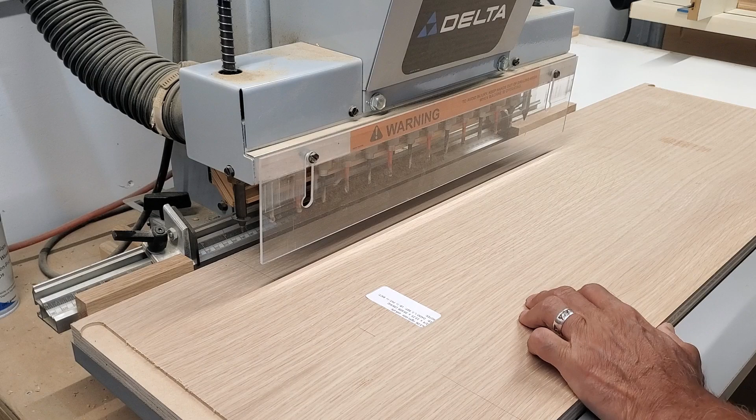So, for reasons I'll get into a little later, I no longer have this Delta line boring machine. If you're not familiar with the purpose of such a machine, it drills the series of holes you probably have inside some of your cabinets that allow you to move support pins up or down to set your shelf heights. Needless to say, in most cabinet projects, there are a lot of holes to drill.

In this video, I'll show you how I set up my Longmill benchtop CNC to drill these without having to open my design software to create a new toolpath for every situation that may occur in a project.

So, about 6 months ago, I downsized my shop from a 4,500 square foot industrial space back to the two-car garage where I started building custom cabinets some 20 plus years ago. My projects just kept getting bigger and bigger over the years, and I finally decided that I just didn't need that much stress in my life anymore. So I downsized and resolved to only take on more manageable jobs like bathrooms and small kitchens.

The downsizing process required me to say adios to any single-purpose machines I had, and one of the first to go was my Delta line boring machine. Coincidentally, it was the first single-purpose machine I purchased when I started building cabinets in my garage. I had tried one of the drilling guides on the market, but knew pretty quickly that the Delta wouldn't take long to pay for itself. It does in about an hour what took me a day with the drilling guide. But still, no single-purpose machines had to be my new mantra.

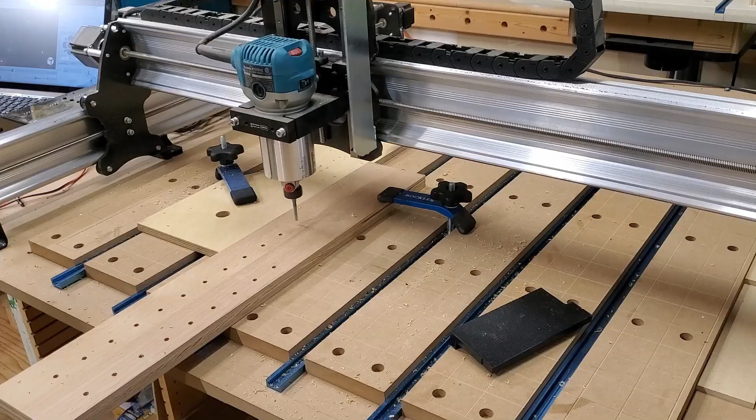Therefore, what I needed was to figure out the most efficient way to create the Gcode to drill lots of holes in straight lines with my Longmill CNC. I mean, how hard could that be? All I needed was to learn how to read and write Gcode and a way to program something to do it for me based on some basic parameters. I thought an Excel spreadsheet would be ideal. I could use one spreadsheet to list my parameters, then write the Gcode to another using Visual Basic, Excel's built-in programming language. I'm far from being a proficient programmer, but I know enough to muddle my way through.

What I ended up with is what I call my Parametric Line Boring Gcode Generator, or PLBGG for short. If you want to skip all the Gcode and programming stuff and see how the PLBGG works, you can use the bookmarks down in the description. And no, I won't hold that against you.

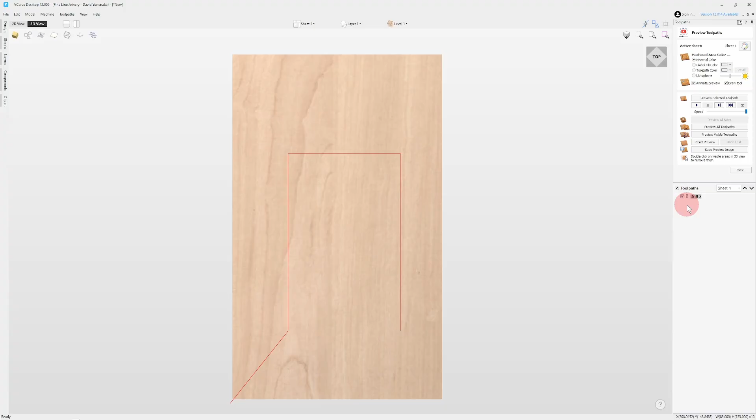Clearly, the first thing is learning to read and write Gcode. I created a sample project in VCarve with 2 columns of 5mm holes spaced 32mm apart, created the toolpath, and saved the Gcode file. So far, so good, right? Then I opened the file to look at the code. Okay, I don't understand any of that, but I think maybe I could. I see X's, Y's, and Z's, so that's good. And lots of G's, which obviously stands for Google it.

The most straightforward tutorial I found was this one from How to Mechatronics, which covers the most common commands and simple explanations of how they work. I also found this handy Grbl pocket reference, which is a much more comprehensive list. With these new tools tucked into my belt, I pasted the contents of the Gcode file onto an Excel sheet and proceeded to decode it.

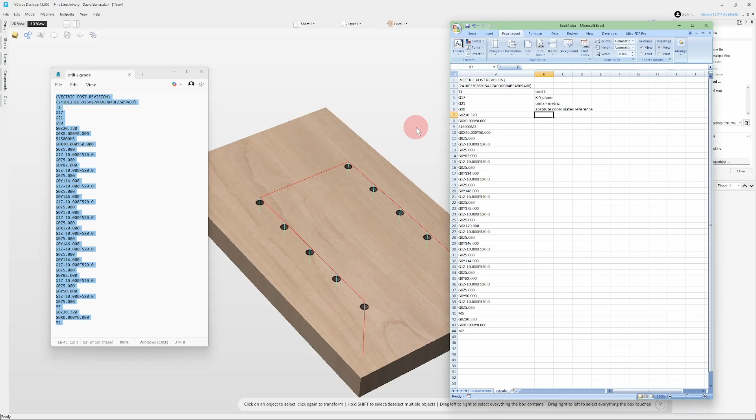With that done, I looked through the Gcode to identify the parameters I would need and copied them to my parameters page. I'll also need the panel dimensions, just like when setting up the sample project in VCarve. Now, a more sane person might have called this good as far as a parameter input page. It would have been all too simple to just use column B here to type in my parameters and start figuring out my calculations from there. But I guess I'm just not that guy because I ended up with this. Yeah.

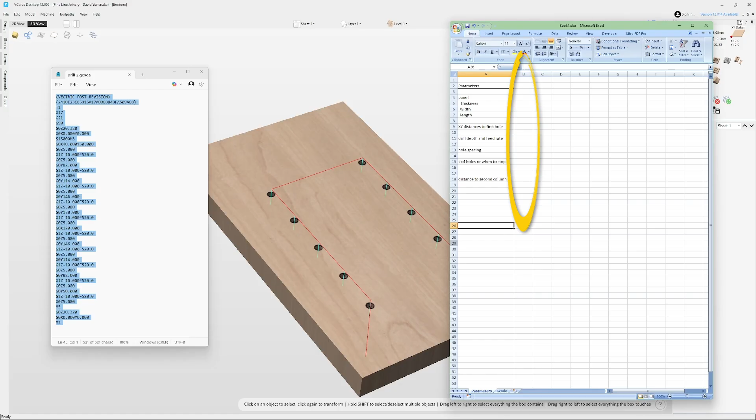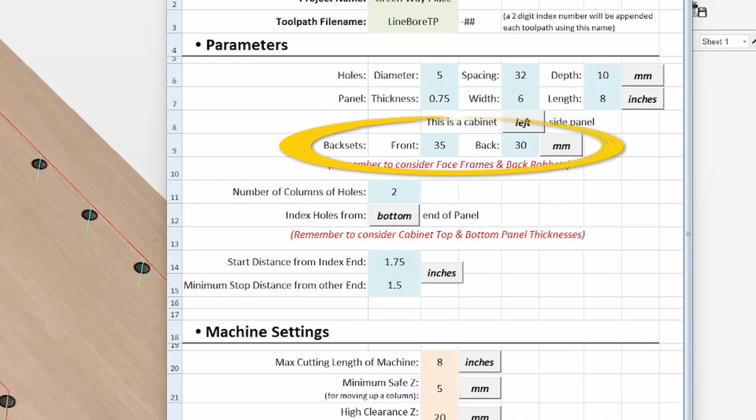So this is the main parameter input section where I can enter the basic hole info and panel dimensions. Reviewing my thought process from the years of using the old Delta machine, I knew I would need to specify the backsets from each edge. Those are the distances from front and back edges to each column of holes. I would also need to specify the start distance from the end of the panel and where to stop drilling the holes.

Here I can choose whether to index the holes from the top or bottom of the cabinets. I generally use the bottom for base units and the top for uppers because that'll usually cause the shelves to all line up across a bank of cabinets. I decided to add the option of being able to drill more than 2 columns of holes for the rare case of needing a third column for extra deep shelves or when I know shelves will be heavily loaded.

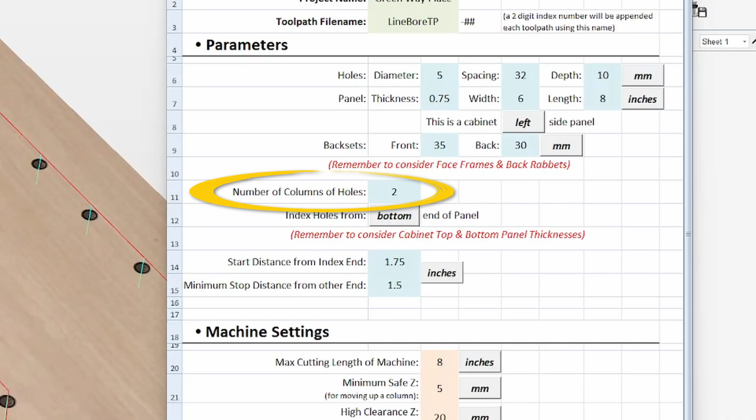And lastly, because I want to zero the workspace once on a single alignment fence on the CNC bed, I need to know whether the panel being drilled is a right or left side. If I always place a front edge against the alignment fence, a right side will have its top end at 0 and a left side will have its bottom end there. So I'll need to calculate an adjustment for that.

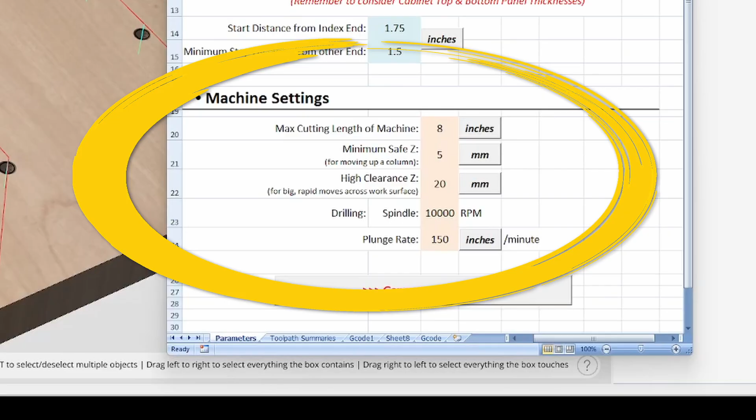I have this section for machine settings. I know I'll need to tile panels that are longer than my machine's cutting capacity, so I can specify that here, as well as my Z clearances, spindle speed in case I upgrade to a spindle, and drilling plunge rate. And each of these dimension inputs has a button that toggles between metric and inches, so for convenience I can mix and match units at will.

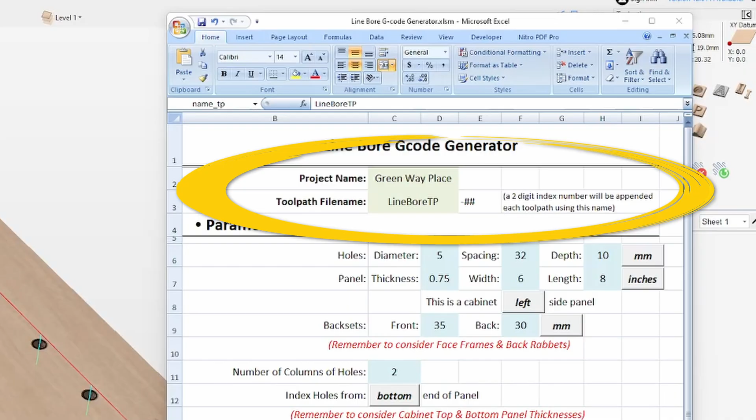Up at the top of the form, I have a place for project and toolpath names that'll be useful for generating a toolpath summary page. Unable to procrastinate any longer, I finally fumbled my way through the programming and eventually ended up with this, which takes all the input info, performs some calculations, and spits out Gcode.

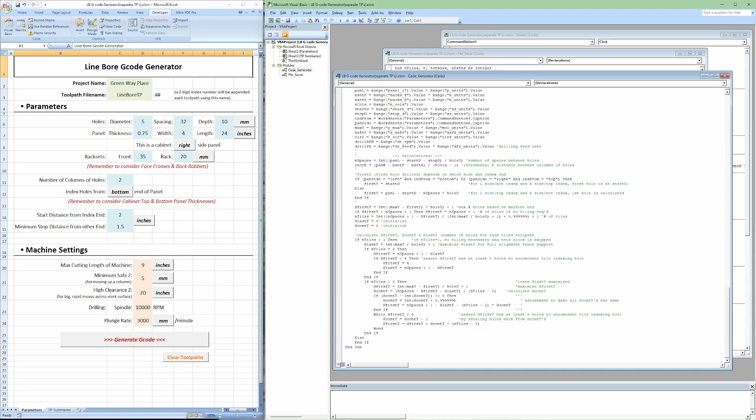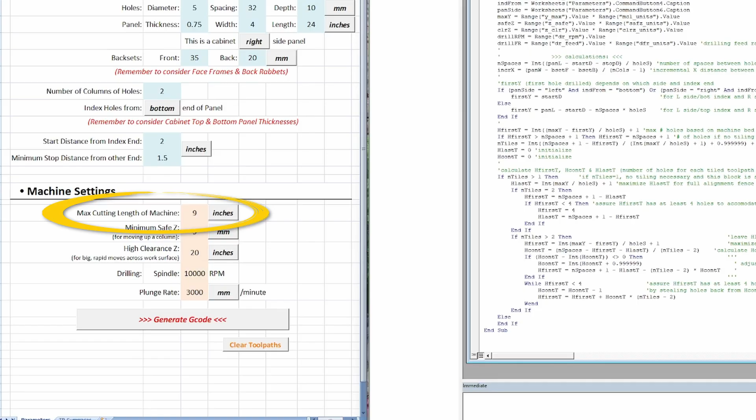By the way, if you've noticed how short I have my machine cutting length set, that's to keep the Gcode output short, to make it easier to proofread, and to make the actual testing on my machine faster and use up less material. This button runs my program and makes the magic happen.

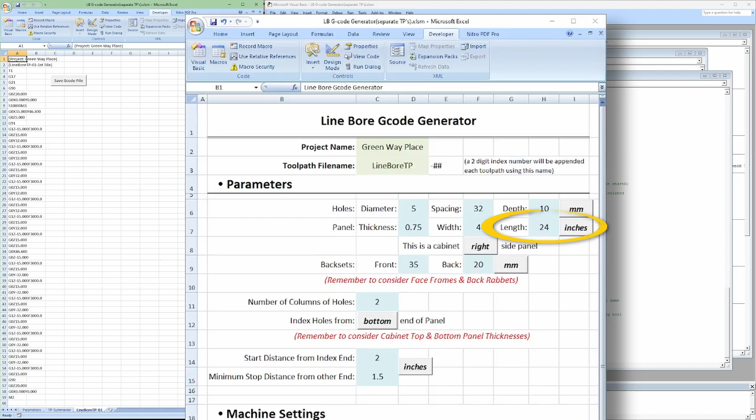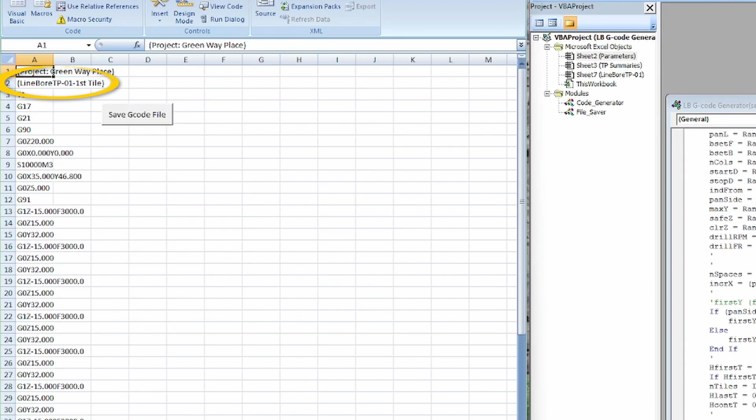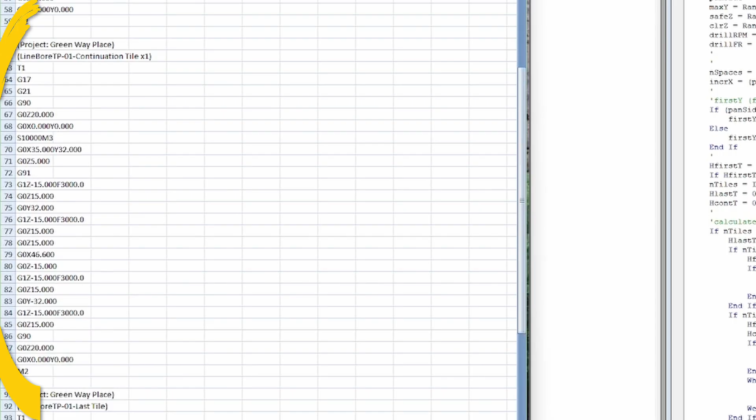Bam! So, based on the panel length of 24 inches and the maximum machine cutting length of 9 inches, line boring this part would require 3 tiling operations. Listed are the Gcode sets for each of those. The first tile, 1 continuation tile, and the last tile. I designed this so that when more than 3 tiles are required, the continuation toolpaths will all be the same. For example, if this would have needed 4 tiles, the continuation tile would be labeled ×2 here instead of ×1.

From here, I could copy each of the toolpaths into a text file, change the file extension to Gcode, and they would be machine ready. But why not automate that too? Back into programming mode, I worked out how to do just that, plus generate the toolpath summaries I mentioned earlier. All of that is triggered by this button.

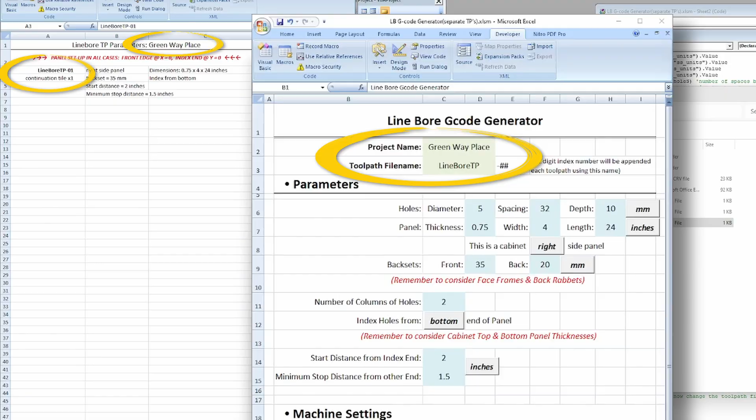I now have these 3 tile components of Toolpath 01, which correspond with the matching name on my summary page. The project and toolpath names carried over from the parameter input form. Looks like it's time to put these Gcode files to the real test. I'll load the first tile toolpath into gSender and give it a whirl.

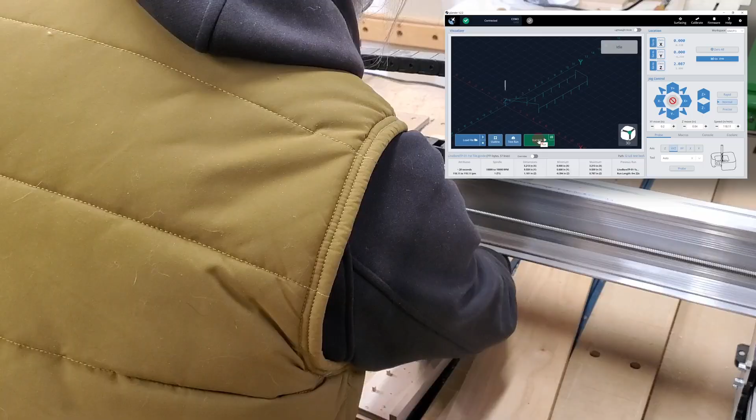So far, so good. But let's break here for a second to talk about indexing these tiled toolpaths. I wrote my program with the intention of indexing everything after the first tile off of the center of the last hole drilled on the previous path. With that in mind, I designed this little indexing tool.

These pins are 4.8 millimeters to fit into the 5 millimeter holes and spaced 32 millimeters apart. Similarly, this edge is 32 millimeters from the center of the last pin and will bump into the end of my alignment fence. My Excel program starts each successive tile from y equals 32 millimeters. So let's see how it works.

Okay, for starters, if I made the block from a piece of clear plastic, it would be a lot easier to find the holes. I'll load the continuation tile toolpath, which in this case has only 2 rows of holes.

Okay, it looks like it skipped a row of holes, but what happened is that I forgot to line up the end of my index block with the last hole drilled. Instead, I placed it with its pins in the last holes. I'll need to memorize this workflow.

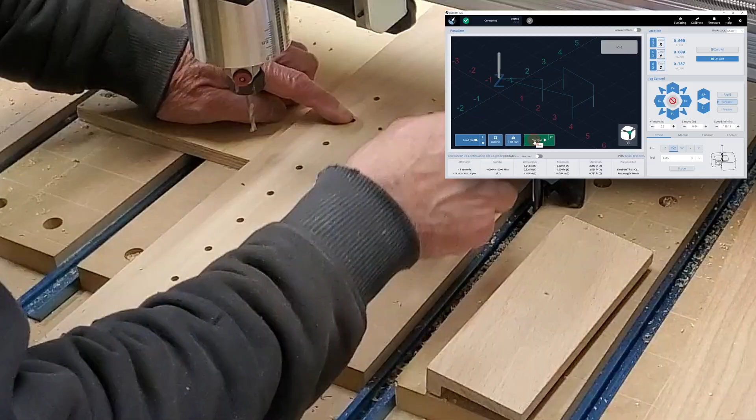Well, that was better, except for trying to drill through that hold down. There, let's just pretend that didn't happen.

All right, looking good. That was a right side panel. I also generated a set of left side tiling paths. Hopefully I'll end up with 2 parts that mirror each other.

In case you've wondered why that continuation tile only has 2 rows of holes, that is by design. I distributed the holes among the tiles, always leaving the maximum number possible for the last tile. That assures that the panel being drilled always has full contact with the alignment fence. If the last tile only had a few rows of holes to drill, it could have very little contact and be more difficult to align properly.

I think that's going to work great. There is one more workflow issue I want to improve on, though. That's the fact that I have to load a new toolpath into gSender for every tile. For a one-off project, that's not a big deal. But in production mode, it adds up to way too much time and more chances for me to screw up by loading the wrong file.

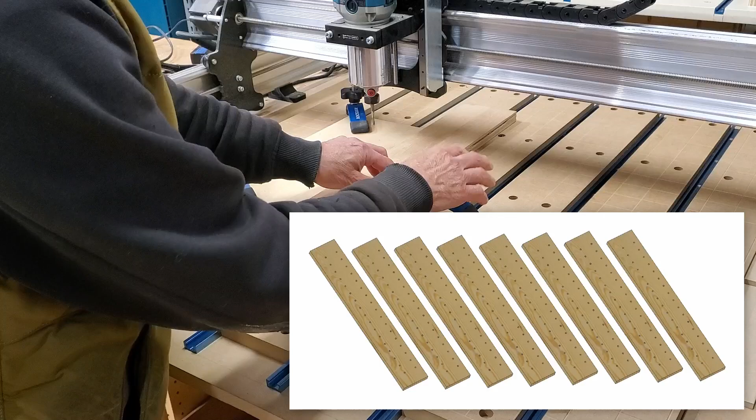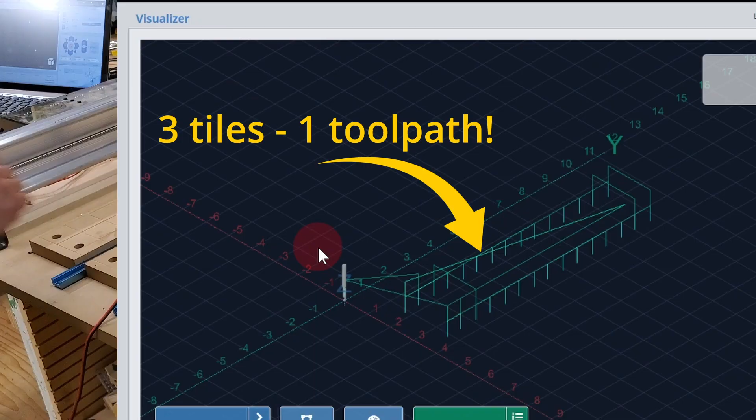Imagine having 8 identical parts that each required 3 tiles to drill. That would take 24 file loads to keep track of. If those 3 tiling paths were combined into one toolpath that paused in between tiles to allow for re-indexing of the part, loading the file once is all that would be needed to mill those 8 parts. So, back to my computer to upgrade the parametric line boring G-code generator to PLBGG v2.

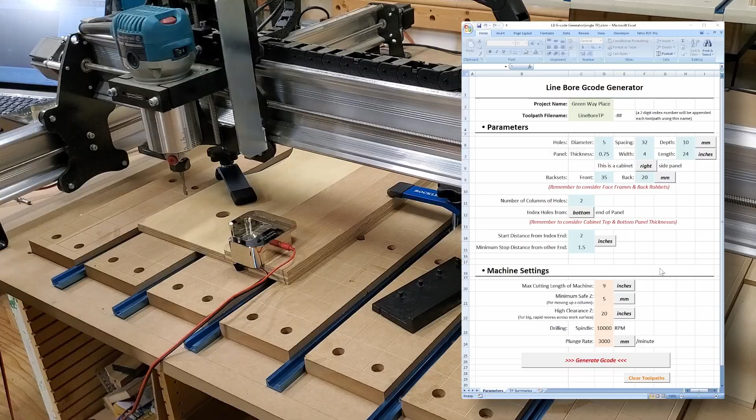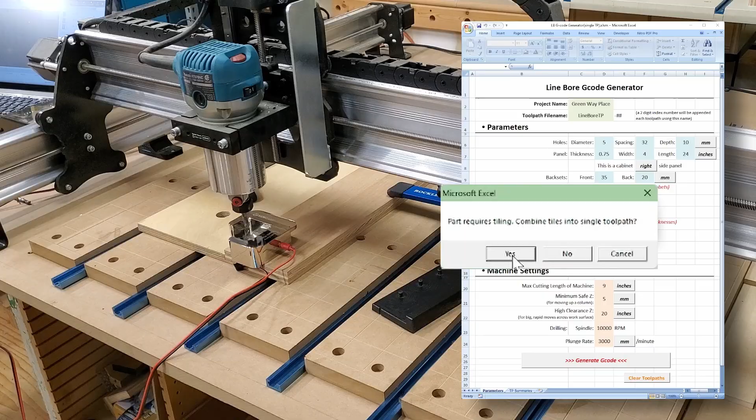And here you have it. It may look the same on the surface, but it's what's under the hood that matters. Generating the G-code now identifies a part that will require tiling and offers the option of combining the tiles into a single toolpath. It seems like that's what I would always want, but I left the option just in case. And there's my single combined toolpath.

By the way, I set this up to always save the G-code file to the same folder that the Excel file is in. So in practice, I would have a project folder, a CNC subfolder within that, and a line boring subfolder within that one, with a copy of the Excel PLBGG file living there. And that's where my G-code files will be created.

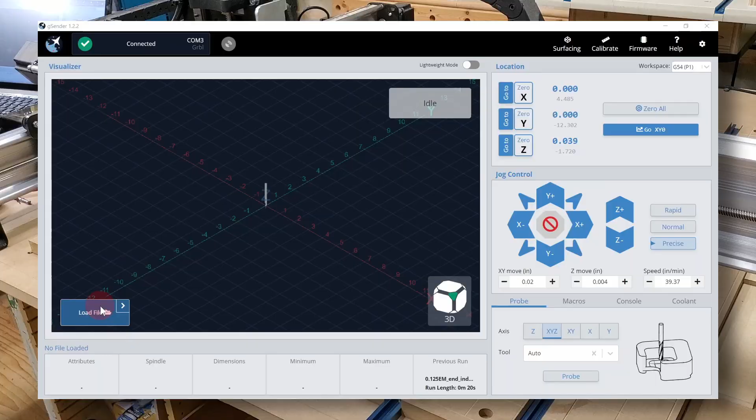I use an M8 command in my G-code and an IoT relay to automatically turn on my router, but for some reason I had the IoT switched off. Oh, crud. I guess I lost my Z0 when I tried to ram that drill bit down through the wood without it running.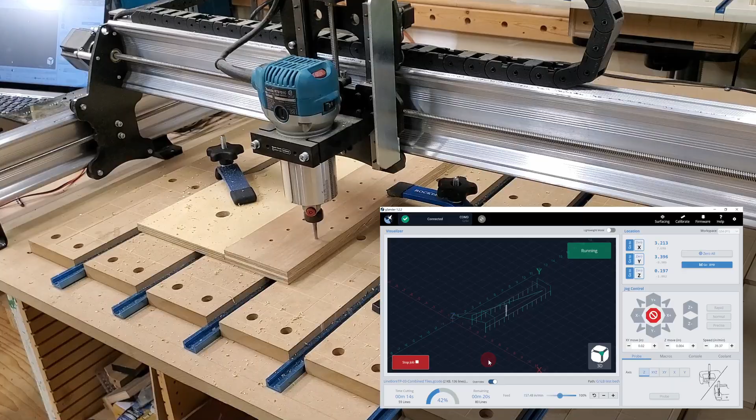Notice how I have the XZ gantry move back out of the way, giving me better access for indexing the part. Saves having to jog it back every time.

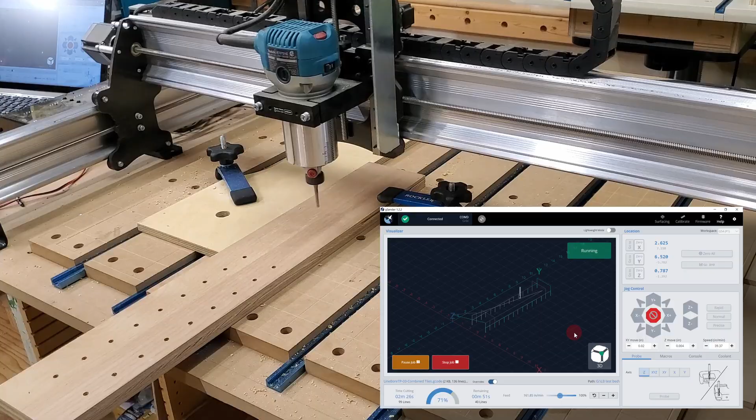I gotta say, I'm pretty pleased with how this is working. I think the upgraded indexing tool was a great improvement over the first one, and all in all, I think this will make a fine replacement for that Delta machine.